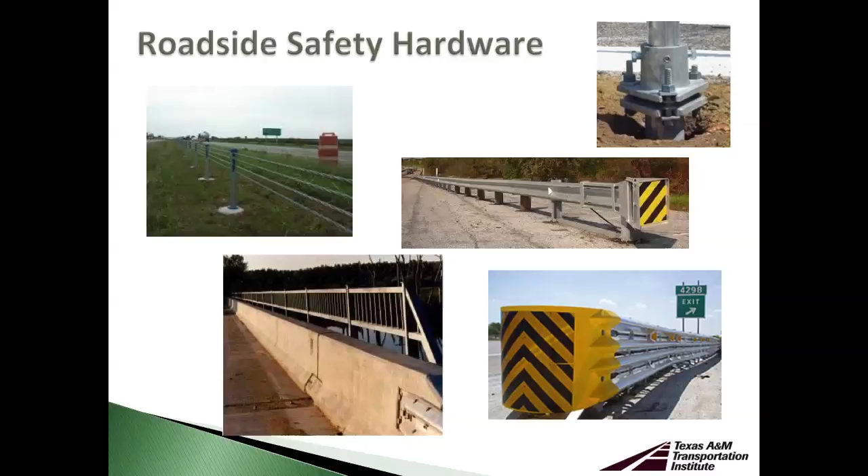Or, if you think about bridges, we need to put rails on bridges because we need to make sure that if anything happens to some vehicles, and these vehicles are errant and go off the road for whatever reason, they just don't go down the bridge, or down the slope, or hit whatever hazard is behind those guardrails.

So basically, we develop devices that need to shield hazards, that need to contain errant vehicles in general. They need to redirect the vehicles. At the same time, though, they need to be safe for whoever is in the vehicle, or, again, I should say, it could even be a rider.

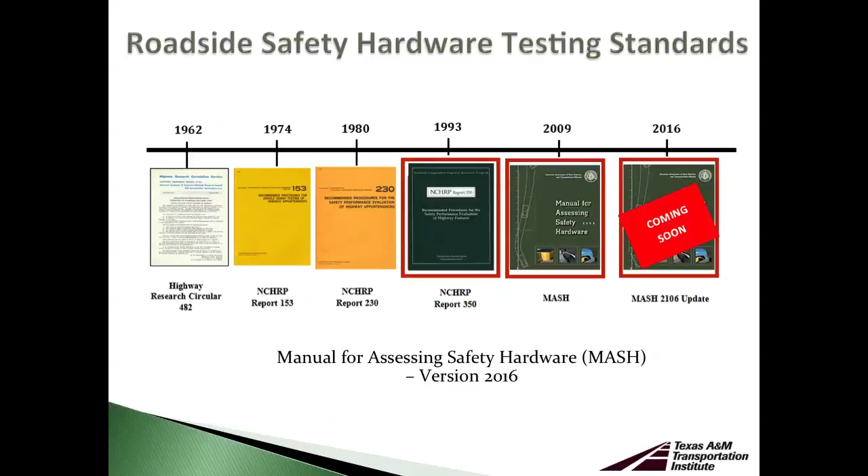We're lucky that since the 1960s, we have had standards that we follow in order to test these devices. You can see here the history of the testing standards that we have. Actually, the very latest one is literally coming out in days. It's more an update of what we had in 2009. Now, the good thing is that we have a very good testing program.

So we know for passenger cars, pickup trucks, heavy vehicles of different types, what type of conditions we need to test these devices. So if we have to hit a guardrail with a car, we know it's going to be at 25 degrees. It could be 44 miles per hour or 62 miles per hour if it's a low or high speed road.

The problem is that there is nothing, unfortunately, for the motorcycle community. There is nothing in these standards that talks about how we should evaluate motorcycle impacts against the roadside safety devices.

So what about motorcycles? So here is the thing. There are very few things that I would like, well, there could be more, but I'd like to touch on a very few things right now. Unfortunately, there is very limited research to address rider safety when impacting roadside safety hardware.

All this morning and later on, we have been talking, or we will talk, about problems with speeds or alcohol or education for riders. But this kind of gets personal because that's my area: when you develop a guardrail or any type of device that you place on the road, you really want to make sure that it's safe in case it's impacted by a motorcycle, and especially by the motorcycle rider.

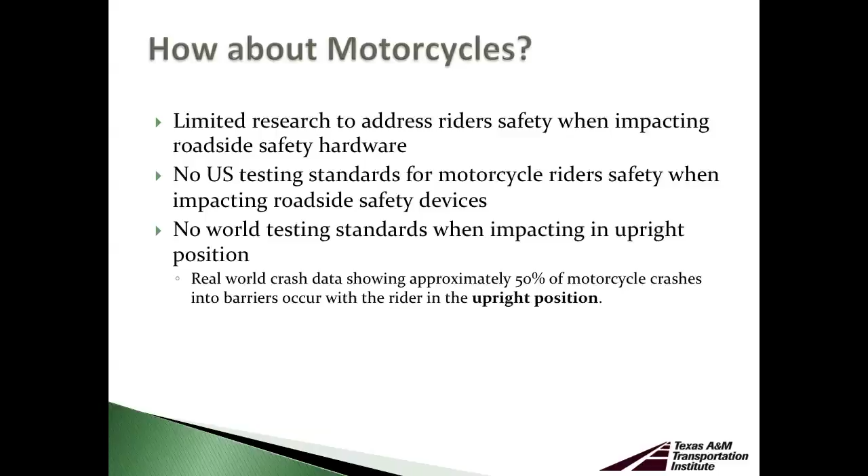And worldwide, there are no standards to evaluate motorcycle impacts against roadside safety barriers in an upright position. There are, and I'm going to go very quickly through them today, some attempts and some specifications that have been developed, especially in Europe and also in Australia, to evaluate how to possibly test motorcycles, which is really not the motorcycle but the motorcycle riders when sliding, but nothing in terms of upright position.

And it's kind of upsetting because there are studies, especially in Europe. Again, I have to bring up not the US, or at least not that I'm aware of, but in Europe there have been studies that have shown that roughly 50% of the impacts of motorcyclists against roadside safety barriers occur in upright position. So the question would be, do we need standards to test motorcycle impacts?

And I'm not going to talk too much about these numbers because you have seen a lot of numbers this morning that might have been even more accurate than what I'm showing you. We all know, and I think that's the purpose of this graph, that we still need to do a lot about motorcyclist safety. This is the trend for motorcycle fatalities, and it's basically constant throughout the past decades.

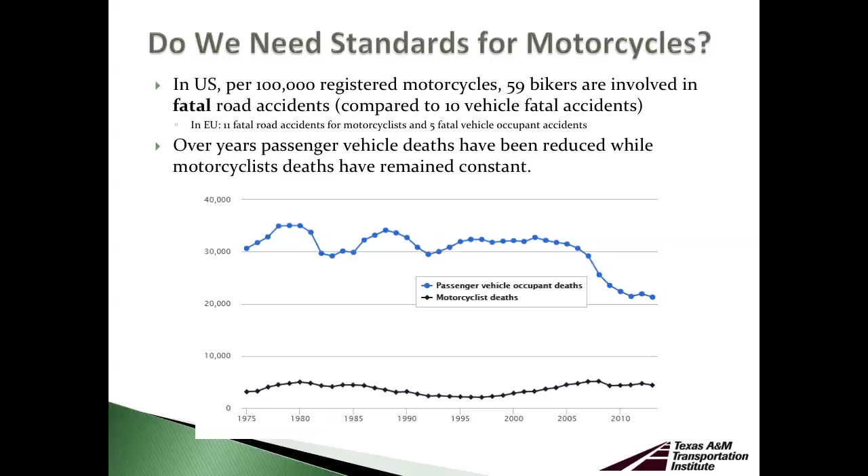And you see here the tendency of passenger vehicle occupant deaths that is slightly going down. So there is a lot of proactiveness to work on safety for other types of vehicle fleet. But from my research area perspective, not much has been done, although there were some attempts, like these standards and specifications that I'm showing you right now. This has all been developed in Europe, so I don't want to talk too much in detail about these. It's very technical, but I'd like to at least briefly touch on some of them.

So these, and I'm not going to call it a standard, this was actually more a procedure that was developed back in 1998 in France. It started in France. They wanted to develop, again, not a standard, a procedure. So that means it's not mandatory; the country doesn't have to test these devices according to this procedure. It's up to whoever developed whatever wants to be tested.

This procedure is specifically looking at the situation where the motorcycle slid, and the rider just leaves the motorcycle and keeps sliding, and then impacts whatever type of roadside safety hardware. Could be a guardrail, could be a concrete barrier, could be anything else that you want to evaluate. So you can see it's no upright situation, it's just sliding.

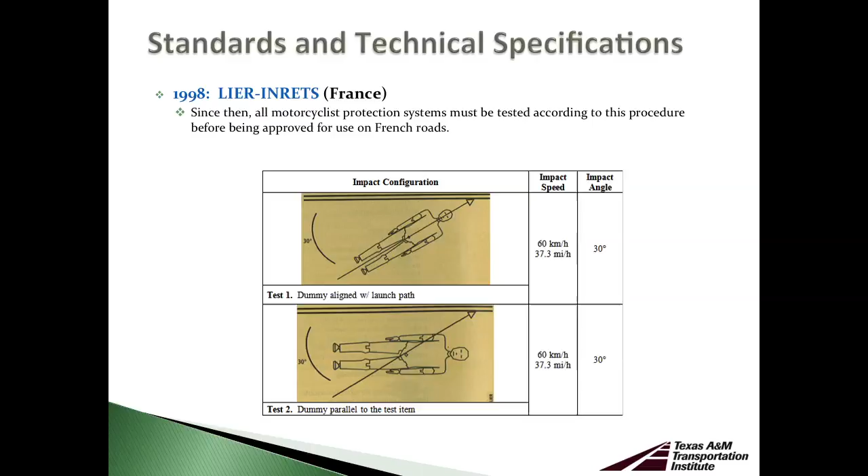This would be a dummy that can be used, at least at that time in 1998 when they developed it, at whatever degree they chose at the time, a 30-degree angle, and it was a 37-and-something mile per hour impact. Now, very briefly, let me keep going on the history.

This procedure was actually then taken from France in Spain, and they kind of retouched it a little bit. They further developed it, they made it their national standard in Spain, but just in Spain. And then in 2008, they revised it a little bit more, and they added 43 miles per hour testing. Again, more or less the idea was the same. It was a sliding configuration, no upright configuration, but they just added this 43 miles per hour test.

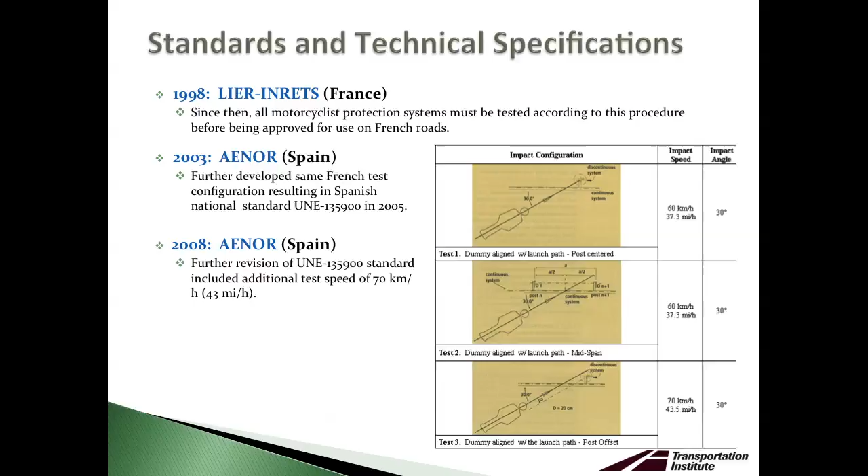One more thing. In 2011, the EU, the European community, started getting very interested in this topic. And so they added a part to their standard, but they made it not as a standard, as a technical specification, and they wanted to start testing roadside safety devices by considering impact with motorcycle riders. Once again, not in upright position, but in sliding position. Unfortunately, I call it here technical specification because it never became a standard.

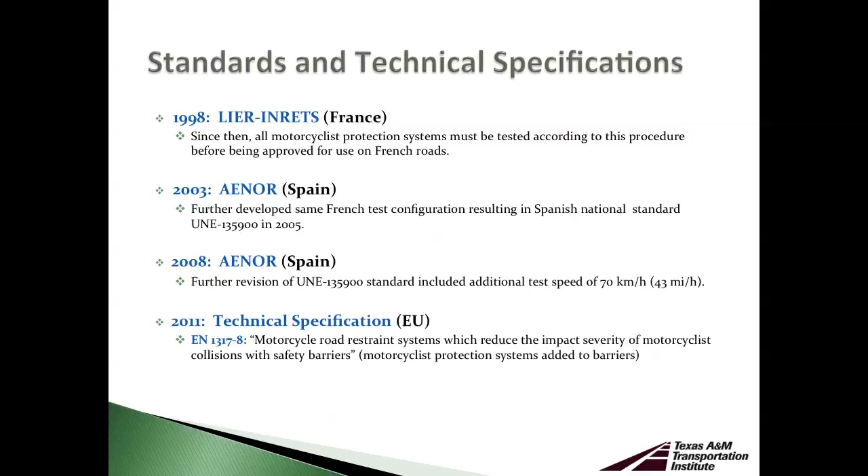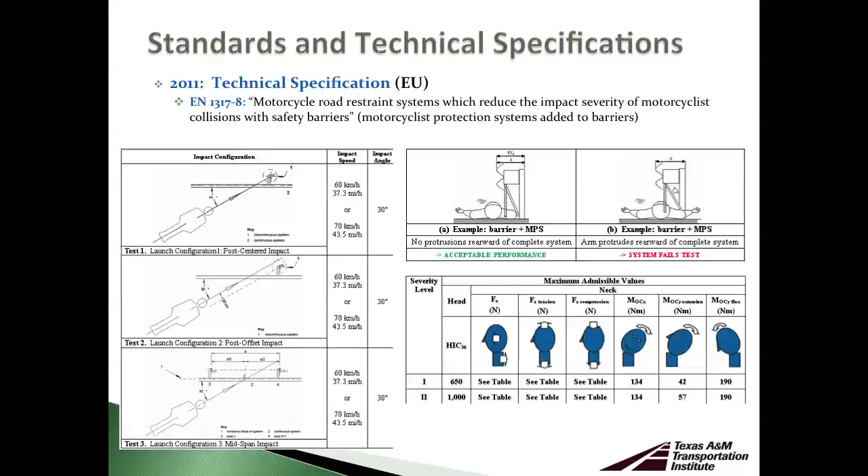And so then we go into the biomechanic component, and we can say, well, if the values tell me that I cannot go more than 1,000, for example, for the head, of course, if I'm over 1,000, I can consider the test a no pass, because I would have an injury that would be incapacitating or extremely severe or even a death. So that was the nice part that I wanted to bring up and give credit, because it's a lot of thought.

However, here are some constraints and problems that came out. As I mentioned before, it's not a standard, it's a technical specification. So this was a comment that came out from the UK, actually TRL at the time. I'm not sure TRL is still around, to tell you the truth, but at that time, they clearly brought up that the UK was not going to test according to this technical procedure, because it's not a standard. So number one, they are not obliged to do that.

And number two, the cost involved with these tests, especially if you consider having an instrumented dummy, can be pretty high. And it's totally understandable. It's just that at this point, the question would be, can we do something else so that we don't stop the research and the improvements just because of costs? Can we find another way?

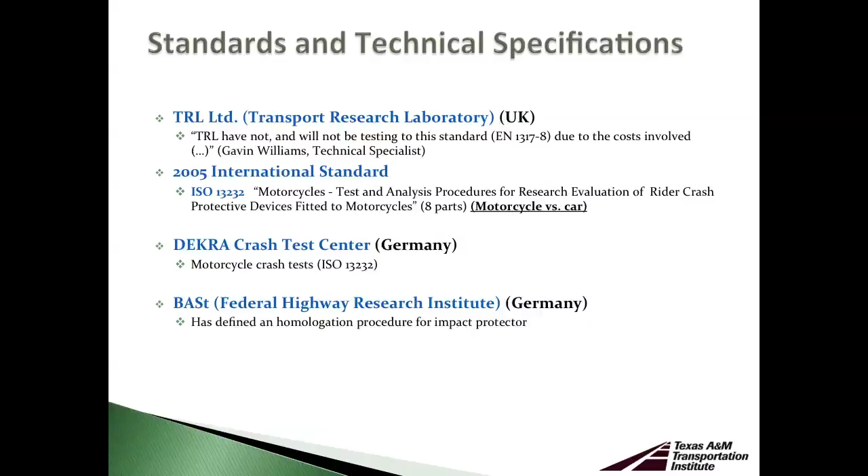And I'll get there in a moment. Now, switching the topic a little bit, but staying in the standards, have you heard of ISO 13232? It's actually an international standard, and it deals with how to test and how to evaluate the impacts of motorcycles against cars, or against vehicles in general.

So it's not exactly the same thing, having an impact against a car or having an impact against any roadside safety device. For example, just think about when you have a roadside safety device, a post, or a combination rail, or even just a guardrail. If you have a rider impacting against it, you have a lot of interaction. With a car, the behavior is a little different. I'm not saying that it's less severe or anything. I'm just saying it's a different situation.

So although there is an international standard, and I think we can take a lot from it to possibly develop other standards for roadside safety devices, it's still not the same. We cannot just take it and apply it. It's not the same thing.

The nice news is that although we don't have standards and we basically just have this EU technical specification, there have been some countries, and I have to say Germany is probably one of them, together with Australia, that have been very proactive from this perspective and have developed different crashes, or I shouldn't say crash procedures, but they had situations where they crashed the motorcycle even in an upright position. So they've been very ahead in the community itself.

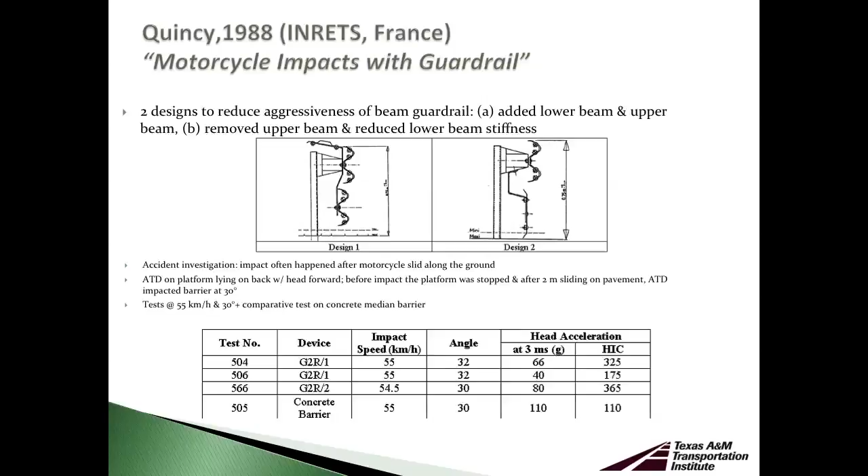Keep in mind, all the evaluations, all the changes or considerations that they have made to the designs ultimately still need to be tested according to their testing programs for vehicles, because in Europe they have it too. So you can modify whatever you want, but then you have to go back and test it with the vehicle and make sure that it's behaving as it should. So it's not so easy. You have to consider different things.

These were just a few other data that I wanted to include. I don't know that we want to go into much detail, but I wanted to show you with this study that guardrails themselves can be a little tricky. There can be a lot of improvements, or at least a lot of things that can be investigated to see if we can do something to improve the behavior.

2005, that was actually done between Australia and Germany. There were, I'll show you in the next slide, actually some full-scale crash tests that were developed. And they developed full-scale crash tests with upright motorcycles and also with inclined motorcycles, or actually sliding motorcycles. And they used different types of barriers.

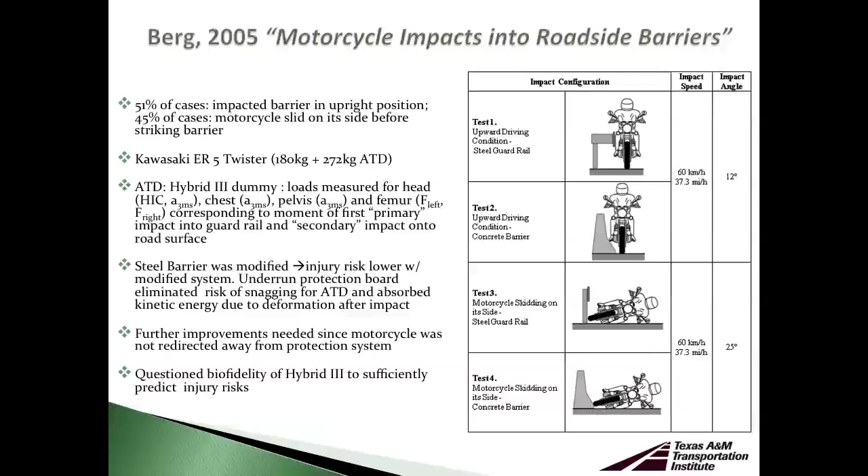They looked at the post and beam, so the guardrail, and they looked at the concrete barrier, because the behavior is going to be different. I'm not saying that impacting the guardrail will be necessarily worse. I'm just saying that the impact is going to be different, and there are different things that we would have to consider. Although with a guardrail having the post, one might think already, we have some issues over there.

I thought it was interesting to bring up this study, first of all, to show at least the proactiveness, but at the same time to show you that they actually have used dummies, and in this case, it was upright motorcycles, so they have used dummies to evaluate the injuries and possible rider outcomes.

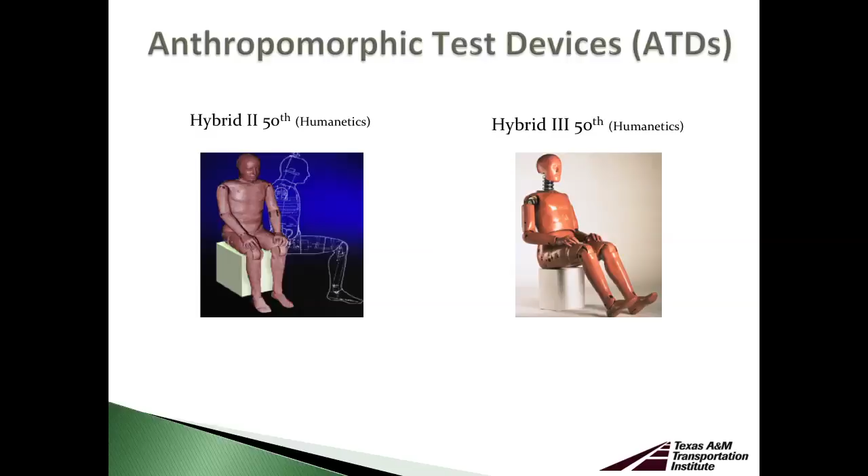Normally, in roadside safety, when we use dummies, well, it's a little more complicated than that, because in roadside safety, we actually don't use instrumented dummies, because we have other ways to evaluate occupant risk, not because we're not looking at that, we just have another way to do that. But in this case, if you're talking about a rider, there is no other way, you have to consider a dummy, because you have to have the real interaction between the rider and the barrier. You cannot do it through some acceleration of the motorcycle. That has nothing to do with what happened to the rider.

So what they did, they used what we call the Hybrid III, and I'll briefly show you in a couple of images later on. Now, that's great. That's what we have that is available. It's relatively cheap. Fully instrumented it costs around $200,000, I'm sorry. But the problem here was that they realized, wait a second, these dummies were validated in frontal impacts. They were not validated for 15 or 30 or 20 degree impacts. They were validated for frontal or very few impacts.

So that was the other question mark. What are we going to do? Are we still going to use these dummies? Are we going to look into development of others? And it can be a little tricky even there.

This was one study that I wanted to show you, because it was actually developed way before my time, early 2000, at Riverside on our campus, where we did some head-on impacts against the barriers and vehicles. I talked a little bit about the dummy, so I'm not going to spend too much time here, but I'd like to show you this, it's just a general picture. I wanted to show you, when the dummy is on the motorcycle, there are different types of interaction, obviously.

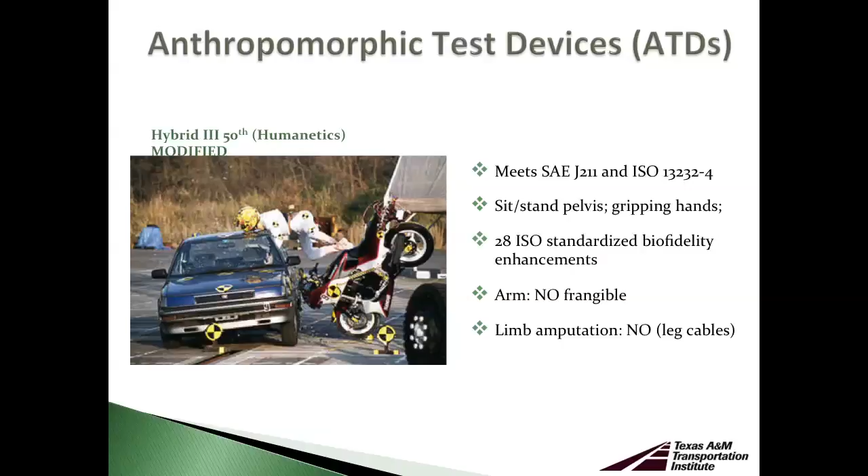The other thing that I wanted to bring up is that in the roadside safety community, especially when they do impacts of motorcycles against cars, they have to modify the dummy that we have, because the dummy wouldn't sit properly, wouldn't behave like a real rider. So there are some modifications that had to be studied and enhancements from the biofidelic perspective.

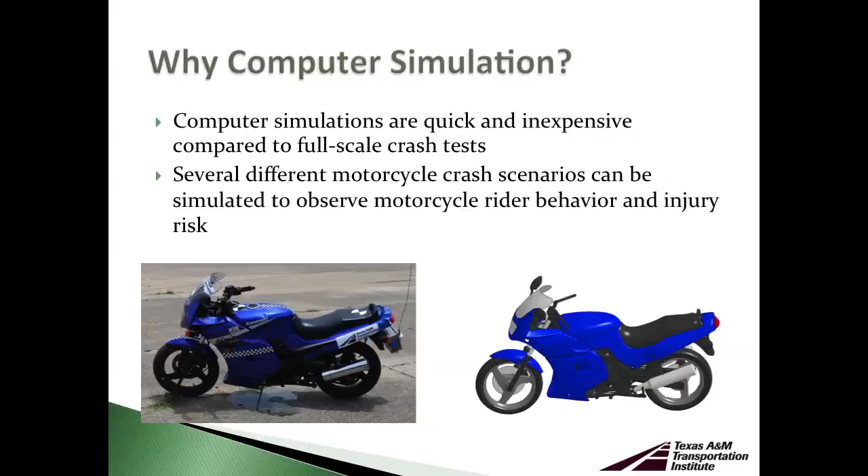Why computer simulations? So here is what I wanted to talk to you about, what we have internally funded at TTI in the last maybe year and a half. It's very expensive testing with motorcycles. We have done it, I'll show you very briefly later a slide on that, but it's very expensive, especially when you start considering an instrumented dummy on top. So another efficient way, which we are very familiar with and do all the time when we test roadside safety devices with vehicles, is using computer models.

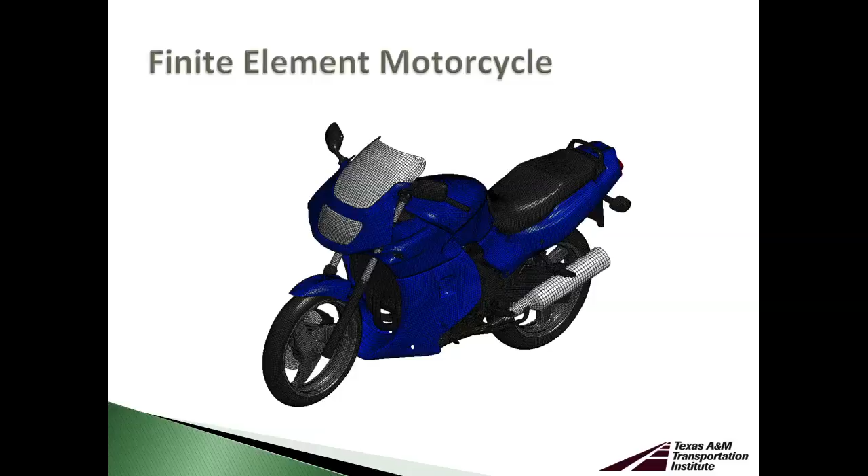So what we did, we developed a computer model. And let me show you, I think this is a little interesting, so I'll show you while I talk. We took a motorcycle. It's a long story why we chose that one specifically. It was tied to a project that's confidential, so I cannot talk too much about that. But we dismantled the motorcycle piece by piece.

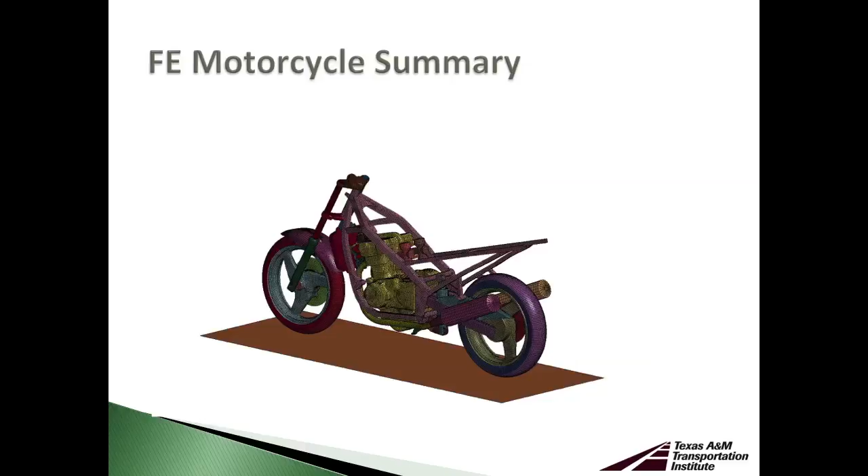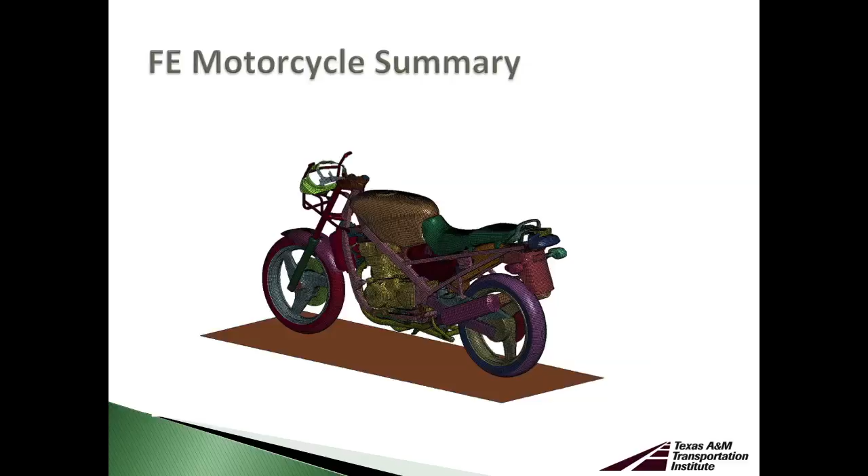We scanned it, and then we developed, for each little part and connection, a model. We developed a surface, a mesh, and ultimately we had our full model, which is right there. We are also including these latest efforts that we're trying to complete in the next few months.

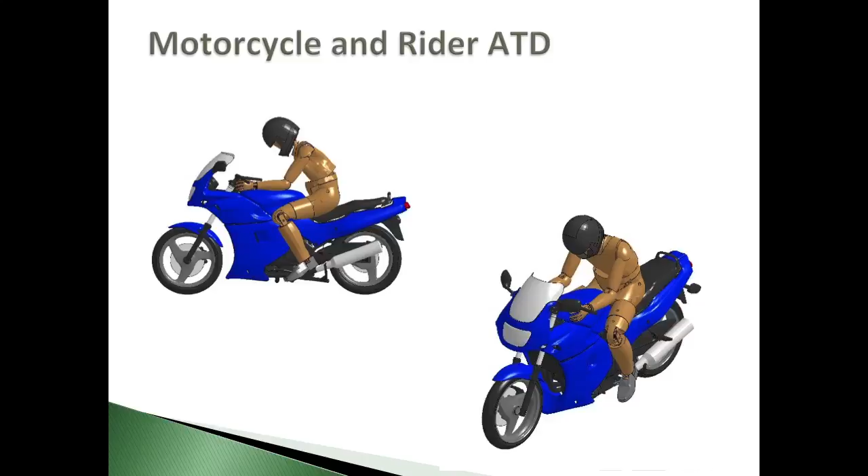We are adding the ATD, the dummy that we were talking about. It's not going to be geared, but at least it has the helmet. That's a good thing. We have used the motorcycle model. Right now it doesn't have the dummy on top. Those are just preliminary simulations. I don't know why it's not going.

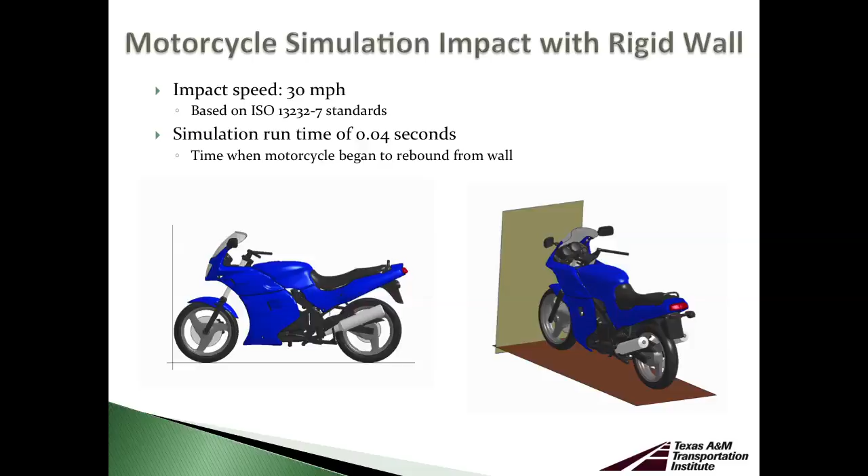Okay, so this is actually a picture that we took. I could not show you a video, it being confidential, but this was a picture that we took. This is the dummy, fully geared with helmet. And if you notice on the bottom, we have developed... so there was a DOT, that was not Texas, that came to us and basically asked us to develop a testing program with motorcycles to evaluate a specific interaction with a barrier.

And so we got to the point where we had to develop a testing program, not standard, and we basically started from zero. We had to find out what speed, why that angle specifically, what type of motorcycle even to choose. That's another thing. What motorcycle are you using? There are different types of motorcycles, and the behavior of the rider can be different.

And so the nice thing about this is that we use a tow cable system. So the motorcycle is completely free. Well, it's first attached to a cable, and the cable pulls the motorcycle at the maximum speed that it should go, whatever speed was there. I think it was 45 miles per hour.

And right before impacting the barrier, we release, see on the bottom, there is this part here, and even the wheels are completely released. So the motorcycle is free, in upright position, to impact the barrier like in real life. So there is no interaction with any system that we have with the dummy on top. And we saw some interesting stuff. That's why in the past year and a half, we decided to develop the computer model of the motorcycle.

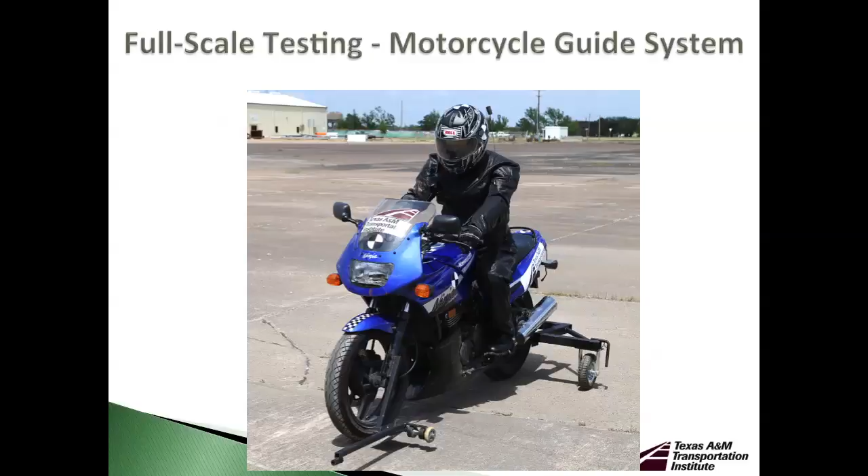So I would just like to conclude my presentation by showing you a couple of examples. I don't want to put across anything, but when you are a passenger, if you look around and you see all the roadside safety devices around, try to imagine what would happen if a motorcycle rider impacts them.

You can have a situation like these. They are really not combination rail, but let's call them combination rail, where on the bottom you have a certain type of rail and on the top you have another one. In this case, it's actually not very hard to improve the behavior of the system so that it doesn't hurt the rider, because this is very simple. They just have some posts, and there is the fence, the net. So you can develop some breakaway devices on the bottom, or a shield.

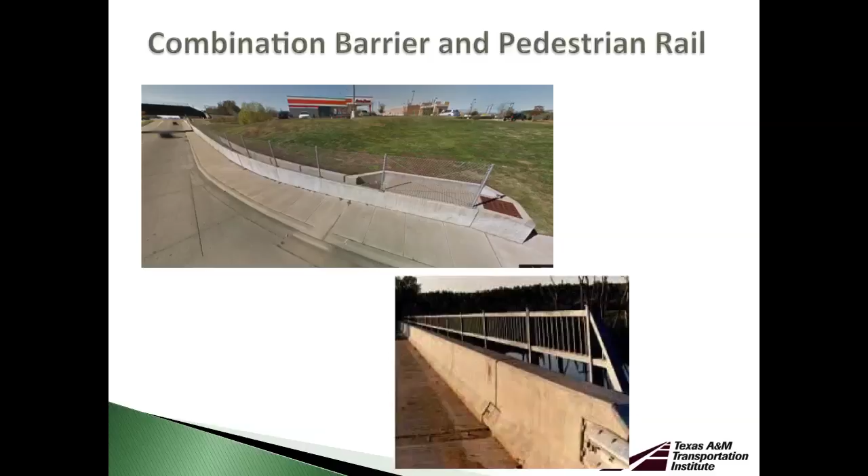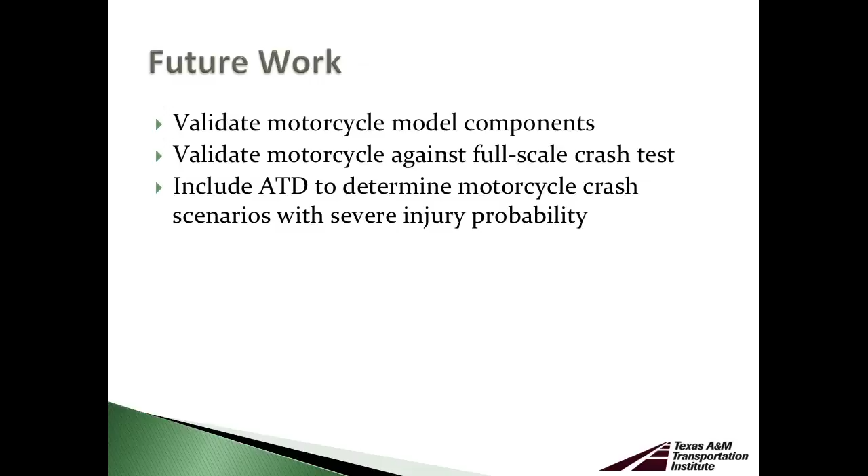So that's more or less where we're standing right now. We are in the process of developing some testing, possibly, or to validate the model that we're doing, the motorcycle model, and including finally our ATD to evaluate the injuries and the severity of crashes.